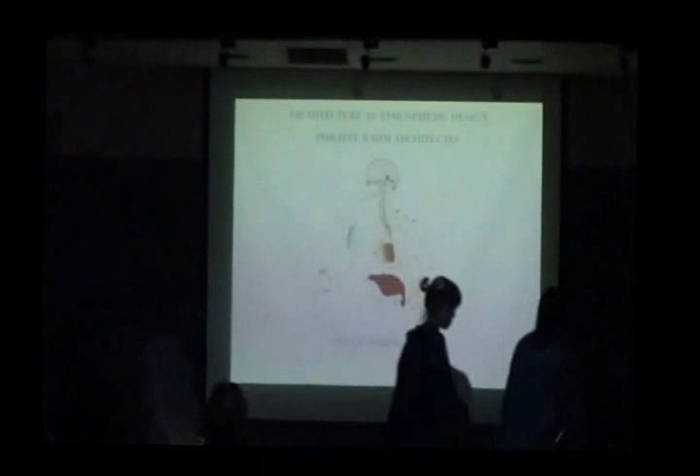Okay, so thank you, Professor Shi, for the invitation, and thank you for the school. It was very interesting yesterday to see all the projects, and I think there is some common interest.

I think about where architecture is going now, and I would like to do a presentation of my work by moving through a book we made a few months ago with 3 chapters, and I will just show one project in each chapter to explain a little my design strategy, and at the end I will present maybe the most recent development of the Taichung Jade Eco Park, currently under construction in Taichung.

Maybe first, the title of the book was Constructed Atmosphere. I don't know the right translation in Chinese, but there is this idea that architecture is about space, and space is about atmosphere, because what is a space? A space is an empty room. It's something empty where people could go inside, and I think the void itself, the space itself, is a real material. It's not empty. It's something. It's composed by light, by air, by humidity, and all these components have different qualities. So it could be warm or cold, light or dark, humid or dry. So there are some components that are defining the space itself.

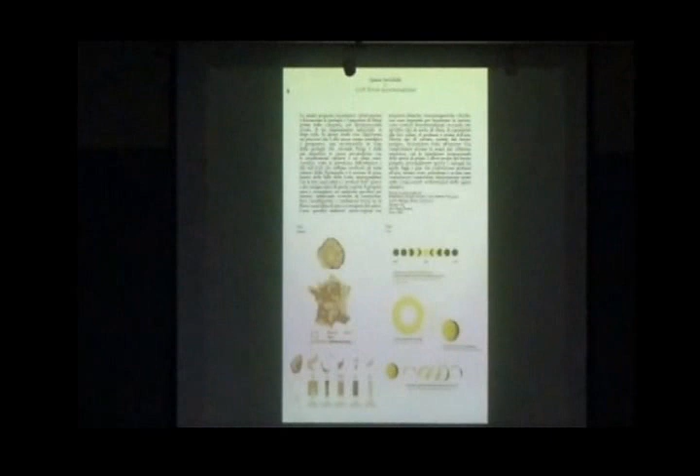I will not explain everything, but there is also a type of food and some different things linked to humidity, linked also to a kind of French smell or things like this. And this is another project based on light. We start to analyze the wavelengths of the light, and to understand the relation if you have a blue light or a red light or a yellow light, what is the influence on the body. For 20 years there has been a very big knowledge about the relation between the physiological body, the eye and the light, and I will show this after for one project.

So this is a study about these elements, like the air, the humidity, the light, to start to analyze them quite precisely in order to work with them in a very precise way that could develop a new imagination for everybody, for the architect, and also some new way of designing.

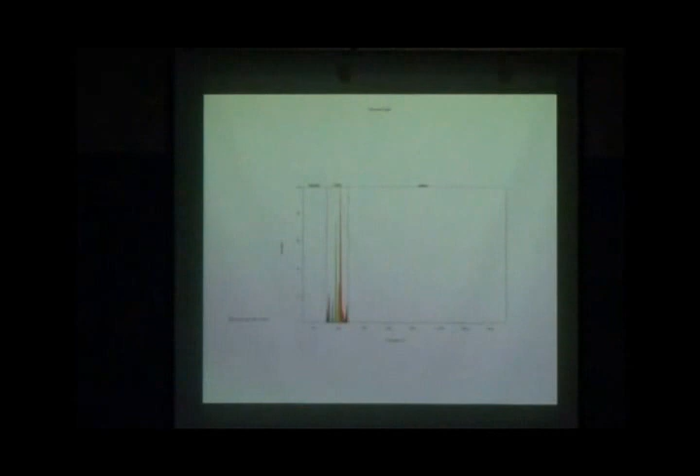And why the LED is better for energy saving is because of the composition of the LED. LED light is based on semiconductor material, and, like I could show this here. Yeah. Today we know like 15 different semiconductors. This is all the semiconductors, and each semiconductor, depending on what type it is, it could be gallium arsenide, phosphide, or gallium, different types of semiconductor. Each of them produces one peak, in a single wavelength.

So it means you will never use one LED that produces infrared. It will be always in the visible range. So you could be very efficient in the choice of the LED. And to create different colors, because the first LEDs were the red and the green, and then recently, like 10 years ago, there was a Nobel Prize for discovering how to do the blue LED light, and then today, since some years, we could have a white light by adding all these three semiconductors together, by adding RGB, you know, like on the screen.

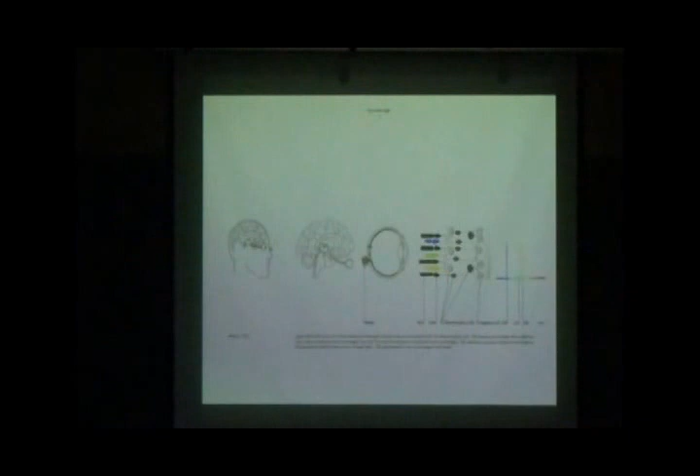Okay, and then there are some other wavelengths, for example for melatonin, and we say for humans we need these 4 wavelengths. So this is what we need. We will pay only $4 for doing the light, and not $40. We just use the minimum according to the intensity of the natural sunlight, because we receive more blue than red from sunlight, according to the natural white light that is perceived. So we reproduce the intensity of each wavelength. So this is the light for the human.

And then we say that in one house, we are not alone. Maybe there is also a dog, a plant, a bird, or a mouse. And we say, okay, what is the good light for the different animals?

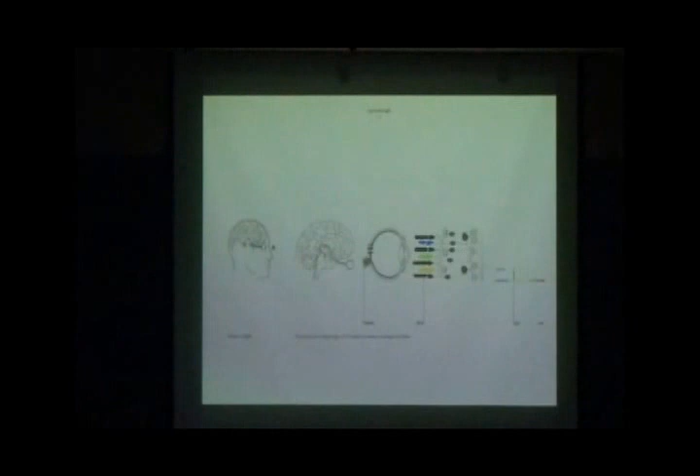So we start to analyze for a mouse. In reality, a mouse sees only one color. He sees a very strange world, because it's a green world. The world of the mouse is green. He sees only at 505 nanometers. This is the only color that the mouse sees. You see more or less green, but this is the only color. So we add one peak of wavelength for the mouse.

And then, the dog. The dog sees only 2 colors, in the blue and green wavelength. So it's why we often say the dog sees in black and white, but in reality he doesn't see in black and white, he sees in blue and green. So these are the 2 peaks perceived by the dog, and we add this also in our lamp.

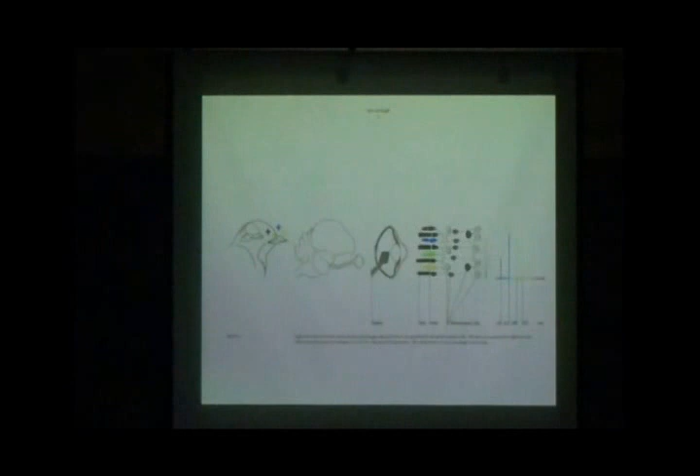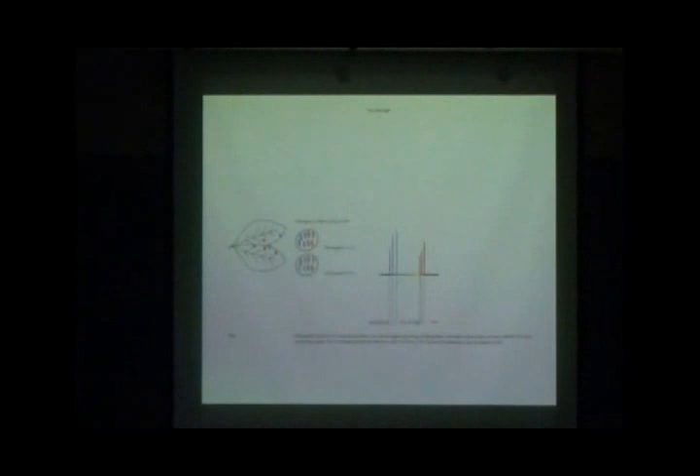And then the bird sees more than us, because he sees also some ultraviolet, and different wavelengths. So we add also the bird wavelengths. And then there is the plant, and for photosynthesis, the plant's leaf is green because it reflects the green light, but all the red light and blue light is absorbed for doing photosynthesis, to transform the carbon of the air into carbon inside the plant. And this is the wavelength of the peak absorbed by the chlorophyll.

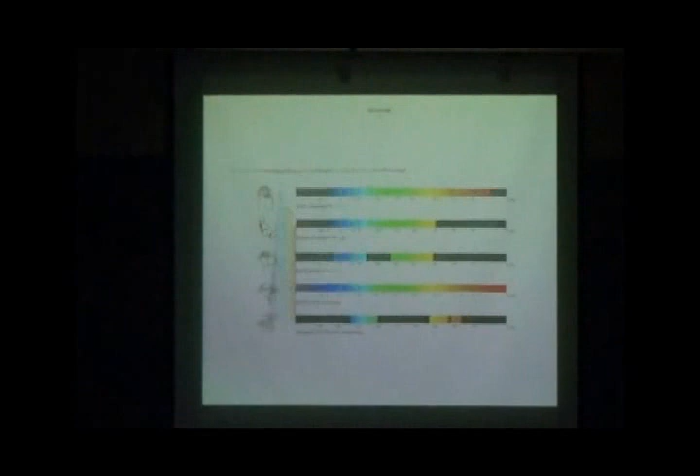There is a chlorophyll A and chlorophyll B, and so we also add this color inside the product. And then this is the intensity, the natural light intensity for each color. And then we choose different intensities.

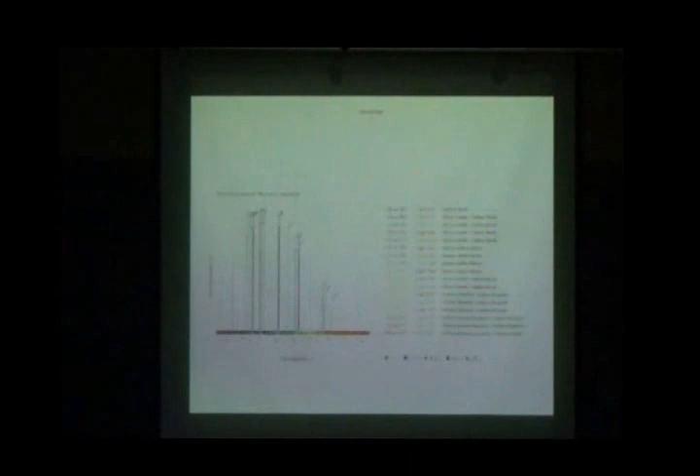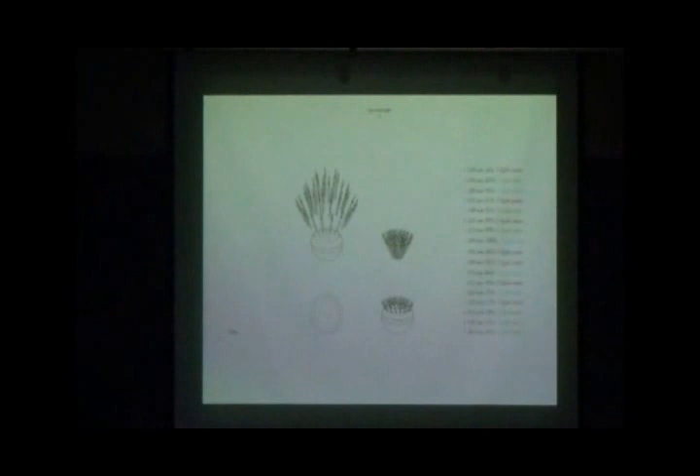And then everything goes together, and finally we say all these wavelengths together create white, because they're mixing together. And so this is the design of the lamp. Each rod is one wavelength, and they converge, focusing on one plate that mixes all the light, and then it recomposes a kind of economical and biological white light.

And then we say, okay, maybe you could turn on, if you are alone in the house, the human light, and if you have a dog, you turn on also the dog light, and if you go out with your dog, you keep only the plant light on.

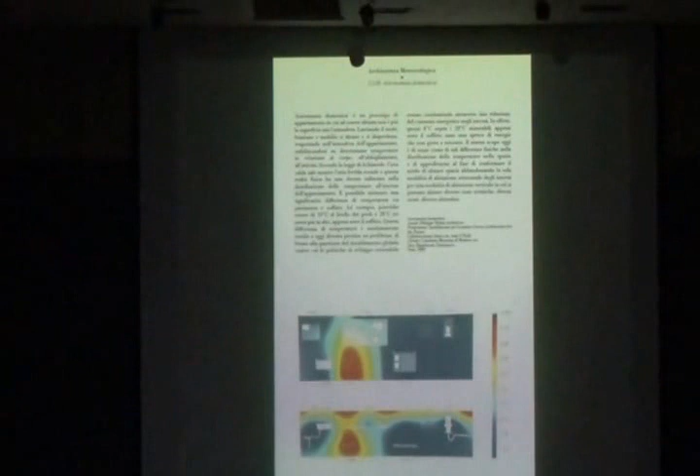This project is based on convection, because the warm air goes up. So in cold countries, for example, you lose a lot of heat under the ceiling because nobody is there. So we propose some different strategies in order to save energy and become more efficient from a heating point of view.

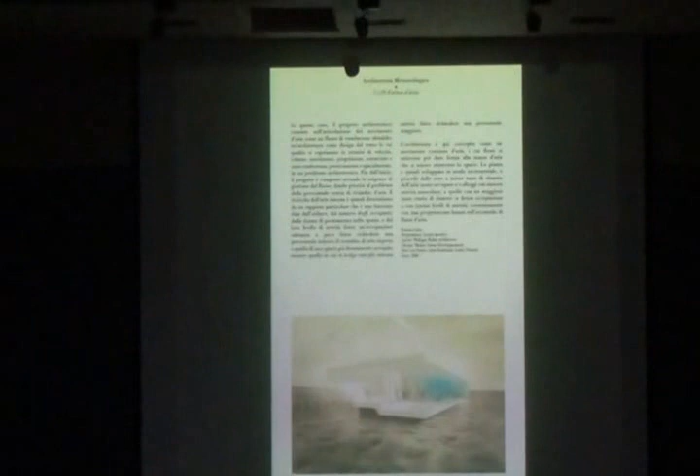This one, for example, is about humidity and ventilation, because you blow air in the dry space first, then the air moves to the most humid area, and then it goes out. So this is how to understand the design of the space based on this.

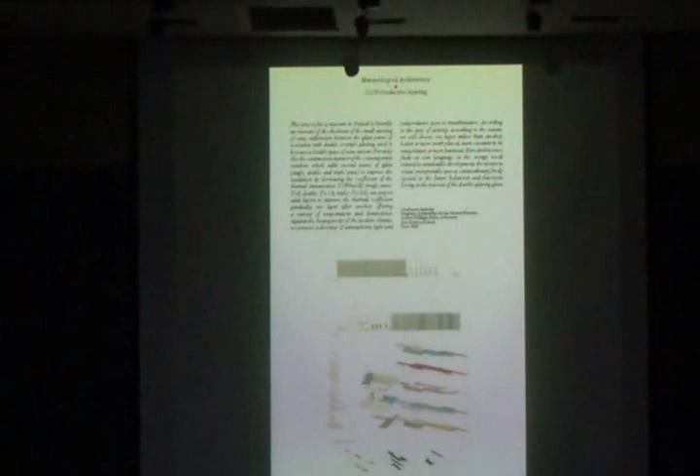Then this one is based on conductivity, the wall and the glass—if you have one layer or two layers of glass, you have more thermal insulation between inside and outside.

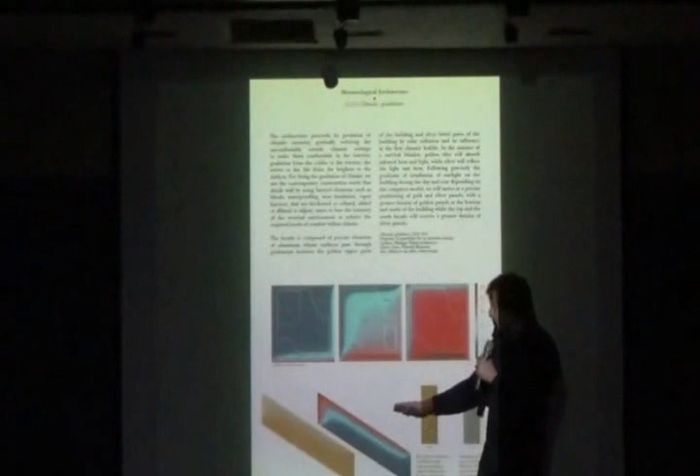This one is about how to design the albedo, depending on the color of the material. We talked about this in the car, but for example, this is a facade, and because warm air goes up, it's very warm at the top level and colder below.

This is a project in Switzerland. So we propose to change the material of the facade in order to accumulate more heat at the bottom and less at the top, to compensate for what naturally happens. We propose to reverse this phenomenon by changing the material—if it's white, it will reflect light and heat; if it's black, it will transform light into heat. So you could decide the color, and depending on the material, it will absorb or reflect infrared. So the choice of facade could be very important from a sustainable point of view.

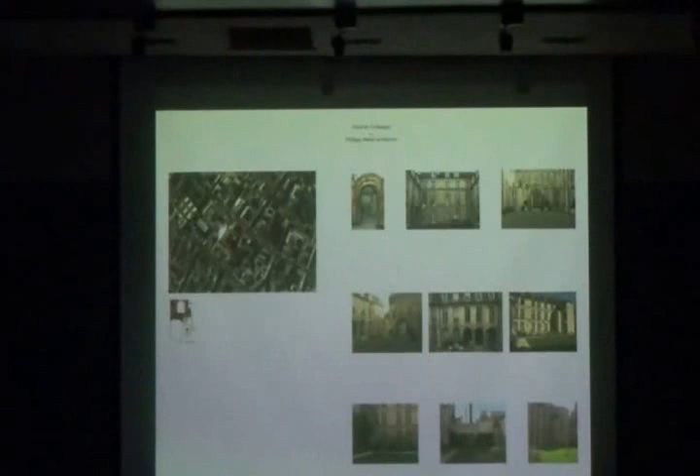So normally you could do nothing outside, and the idea—I was thinking maybe it's not good to do a modernity inside the old, a kind of contrast, but to find a new way of designing things. And we just start to...

Analyze how to change, because in this building the wall's U value, the coefficient of heat transmission, is too high, so it means it's cold. The cold could go through very quickly, and so you lose a lot of heat during the winter to heat the space inside.

And today in France you have a new regulation: you have to have a U value of the wall of 0.15 watts per square meter per Kelvin. So it's in order to block the heat, to use a very small quantity of heat in order to warm the space.

And for doing that, we calculate the quantity of thermal insulation you have to add. It's like 20 centimeters. So you must add 20 centimeters in order to reach the target of the new regulation, it's called RT 2012.

This is the target of the energy saving that all buildings in France must reach today in order to be sustainable. So if you start to analyze, this is a little the history of the building: before it was very cold, because the cold goes through in the floor, and so the floor was really cold.

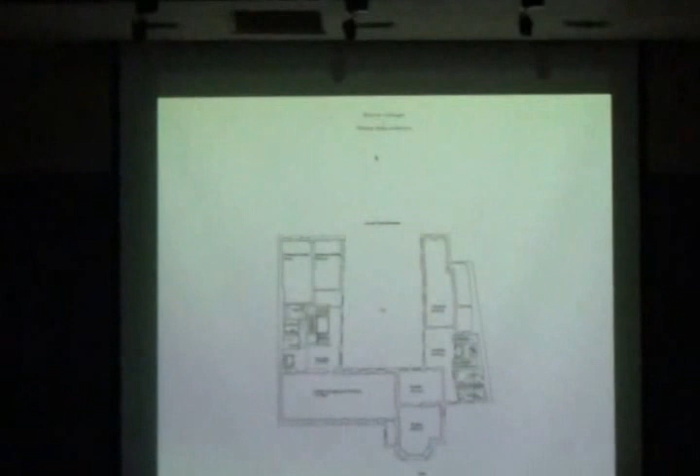And in reality what happens, it creates—I don't know the English name—a moulure. Because if it comes back, it will create, like in the old Parisian style, this type of decoration. So by coming back with this 20 centimeters, we are creating new and useful moulure, and the decoration finds a new, real reason why we need to do some decoration on the ceiling.

And so we do the same for the convection—this is a little the story of convection. Before it was cold, and then there's a fireplace, a chimney, and the furnace, and then the radiator, and today this is the diagram of the different ways of heating.

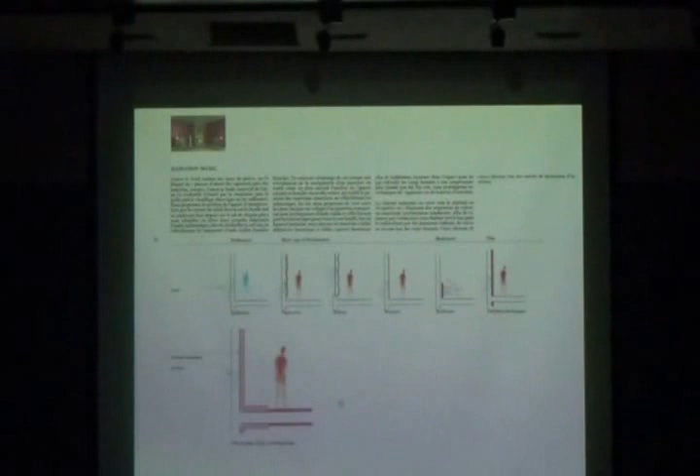So if you use floor heating, this is the curve—this is the most economical and the most efficient curve today to warm a space, because if you have a normal radiator, it becomes too warm near the ceiling. So we change that.

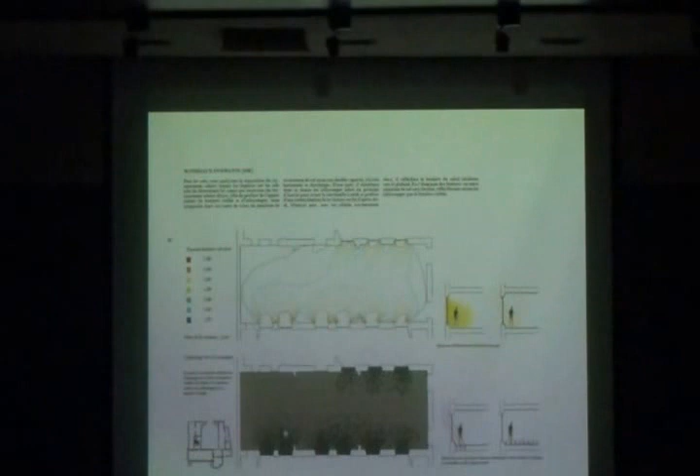And then we continue also with the radiation from the wall, and then the ventilation, the light. And during the winter we could also get some more heat coming from the sunlight. So we could start to analyze the impact of the sunlight on the floor, and say this part will reflect the visible white light, but will transform the infrared, the invisible light, into heat that goes into the ground in order to get some inertia value with infrared natural light.

So we start to make a new pattern according to this, which means you could reinvent the marquetry, the way to design the floor, very precisely, but according to new values, some ecological values.

So you finished the floor part, or? Just say a last thing. So here, for example, this is like the new—

We call this the new style—we call this the Anthropocene style. It's a kind of the style of today, and so here we also use this type of things.

It's copper, a steel plate, in order to take the heat that is accumulated under the ceiling and to bring it back down by conduction, to have like a radiator down below, and here we have panels that block the radiation. So we rethink all the different things according to new ecological and sustainable values.

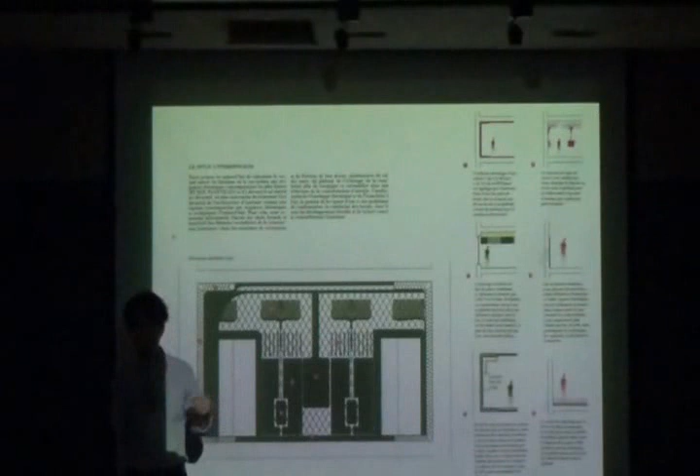Finally, we have two new spaces. One space is this one. It's a little like the project we saw yesterday. This is a new room underground with geothermal wells that go underground. We must have like 2.5 kilometers of structure that go underground. So it's divided in 10 wells of 250 meters down, and it produces 50 kilowatts of heating.

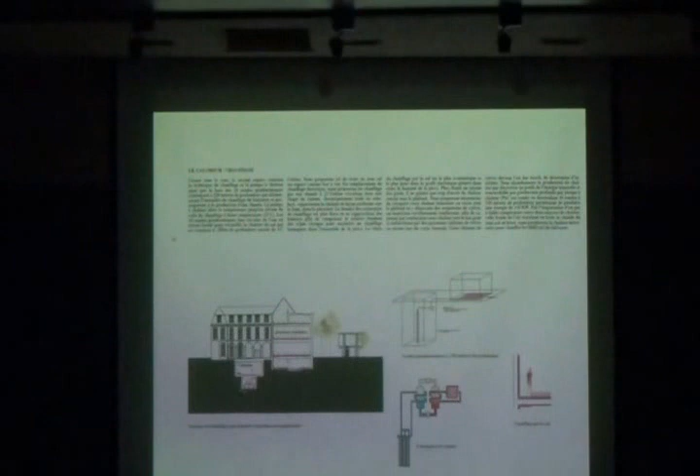So it's warm with these new things here. It will produce all the heating with green energy for all the buildings. So it's no more oil, no more nuclear power. It's green energy that will bring heat to the floor heating. All the floor heating comes from that. So it's a new place. We call this the calorium. It's the room to produce heat. So this is a little the design of this room.

And then we have another one in the garden that will produce the new air, with heat exchange ventilation. So we take the air in the garden, and it's like a greenhouse. We warm the air in the winter, like inside a greenhouse, and then we have a heat exchanger here, and the new air goes there and comes back, and there is a heat exchange here in order to recuperate the heat before it goes out.

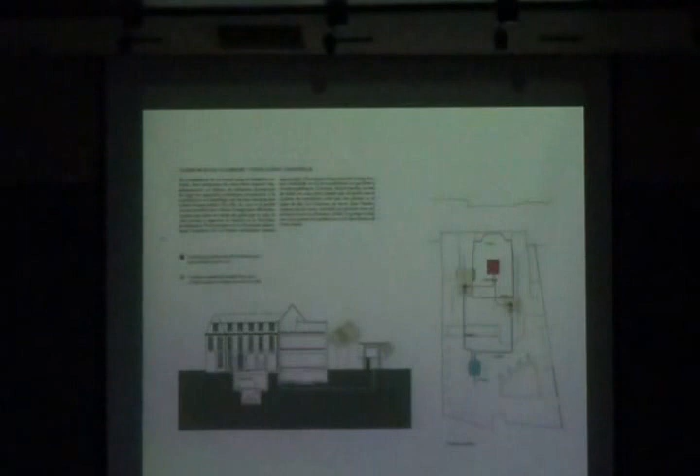Okay, so the last part of the book was about the thermodynamic city, and in this part we present different urban projects, and I will finish with this. This is a project in Copenhagen, and of course the Jade Eco Park in Taichung.

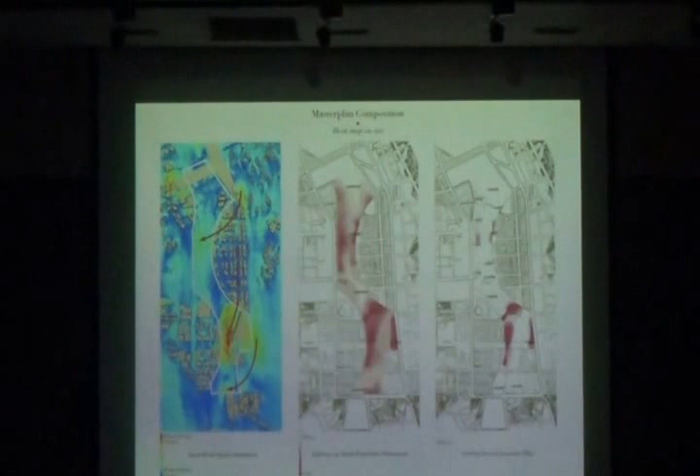And in the red and the yellow and orange area, it will be a little colder or more comfortable. And in the blue one here, it will be warm, very warm. And so we say, okay, we will reinforce where it's a little colder by adding a lot of trees, cooling trees and cooling devices, to create a colder area. And where it's warm, we will let it warm because it could be useful in the end of the afternoon or during the winter. You prefer to go in a warm area than a cold area.

And for doing that, we place a lot of cooling trees. We choose some specific trees that have big leaves or a lot of leaves in order to cool. And we have more than 10,000 trees in the park.

And after, we also create some park equipment, like furniture of the park. We call these climatic devices. This is a little like what you could find in every park in the world. It's like a fountain, a kiosk or pavilion, or a small architectural structure that will give some other experience of cooling effect.

And then, this is a map of the trees. It's very dense. It's also like an impressionist way of composing by gradation. And here these are the cooling devices, and then all the activity follows the climate. So the leisure activities, the black dots, find position inside the park like this.

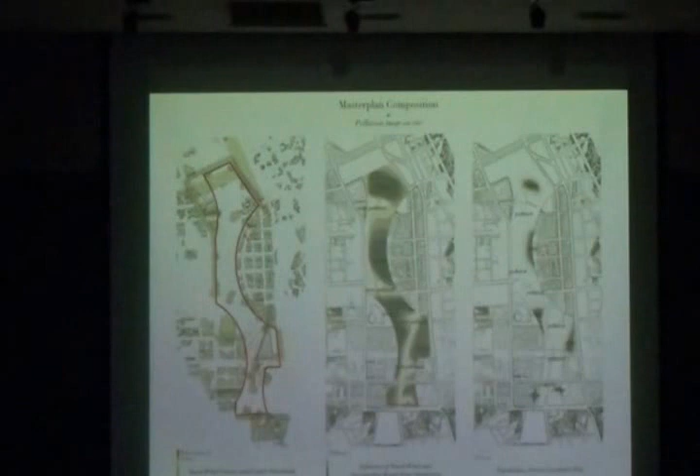And so we did the same for the humidity and for the pollution. There are some big roads here and here and here. So far from the road, far from the noise and the pollution of the cars, we place all the children activity and a lot of trees that catch the pollution of the air, and also what we call the depolluting devices. So these are the trees, these are the devices, and this is a children playground and activity there, far from the road, in the most protected and least noisy area.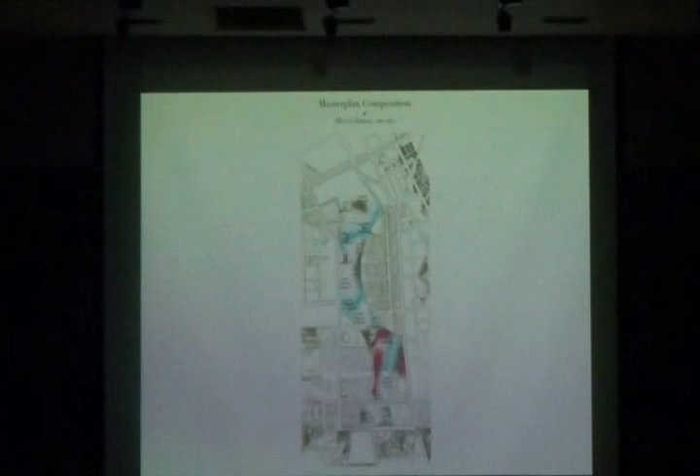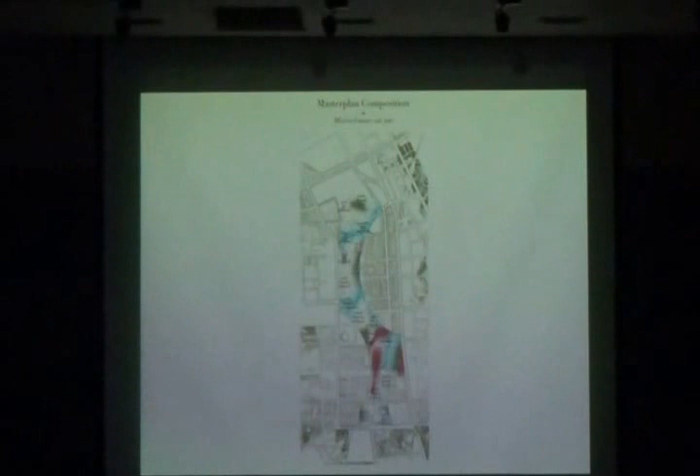And then all these layers overlap, so it generates different types of microclimate. If you prefer to go there, you could go there. If you prefer to go in the most dense forest, you could choose where you want to go. And then we also create some paths that connect the cooling places, the drying places and the depolluting places together with different types of paths.

The black path is for children, it's very flat, very easy to use, also for wheelchairs, and the red one is for a normal promenade, and the blue one is for sport players, so it's a very hard path to use. So it creates a diversity of moving through the park according to what you want.

And these are some photos of the construction like 8 months ago. This is a road that goes through the park, and we create some bridges and tunnels in order to have a continuity of the park everywhere from the north to the south. And we work with a landscape designer, Catherine Mosbach, on that.

And all the hills are for rain drainage, because all the rainwater of the district arrives on the park, and so the topography contains the rain when there is heavy rain, for example.

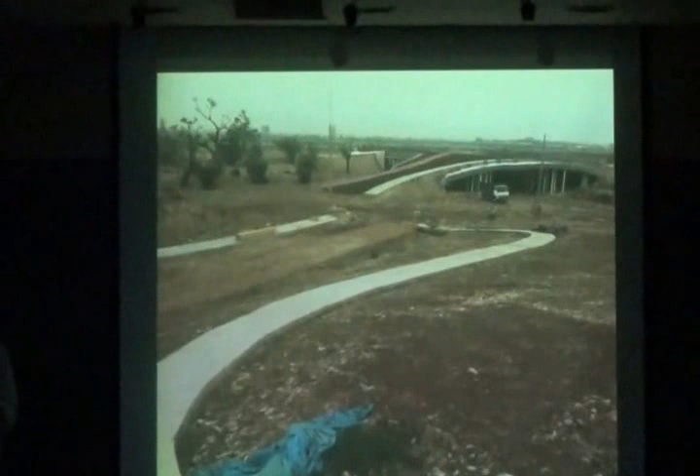Yeah, on this image we don't see the trees because they will come after, and of course here we have saved all the trees that were on site. We have 4,000 trees that were saved and they are waiting here in very good condition in order to move to the new location after.

Then I will present the cooling strategy, and after the intelligent system, and then I will finish in 10 minutes. I hope it's okay.

So this is the first layer, the heat layer. So we see the master plan. We did the master plan, and then we see that there is some area that becomes very dense because we have trees every 3 meters. So it becomes very like a forest.

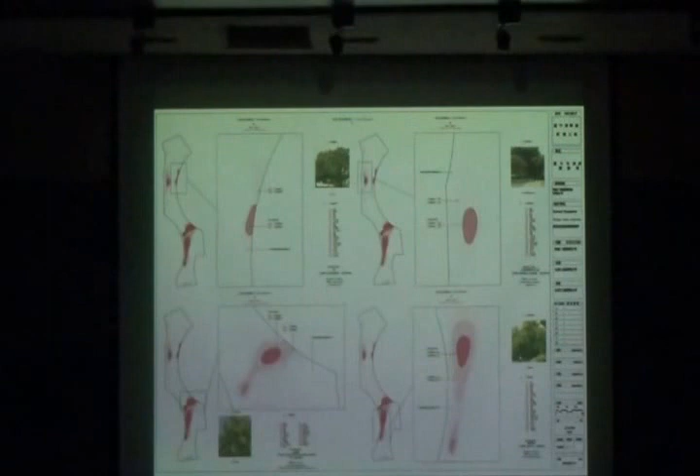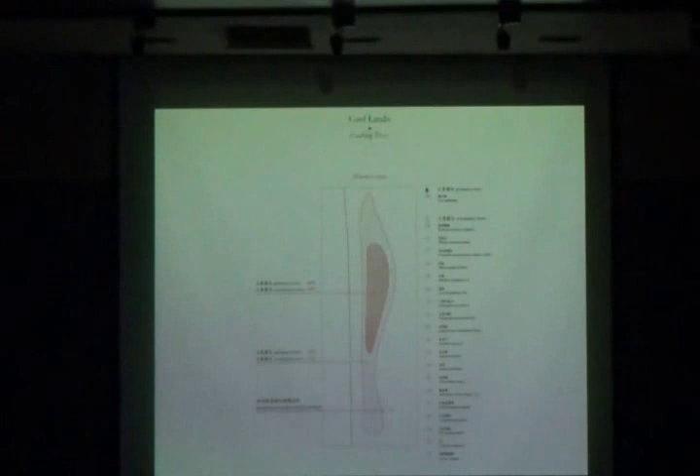And then we have some specific trees there. The choice of the trees is based also on the cooling effect of the trees. We choose some species of trees that have a strong cooling effect. And then sometimes, because we have a lot of trees, we change one of these dots. This is a tree here, so you can see in the middle it will be very dense, like a real dense forest.

And then sometimes, every 10 trees, we change to an artificial man-made structure. And this is one of these. These are the cooling devices. So in reality, it's like park furniture, park equipment, like a little fountain, pavilion, kiosk, this type of things you could find in every park in the world.

But these have some more. Some of them have some specific action. So this one, for example, blows cold air. These are like fountains, but creating mist or cloud and cooling by evaporation. These are like cold radiation with a kind of network of cold water running inside. These are shadow, different types of shadow.

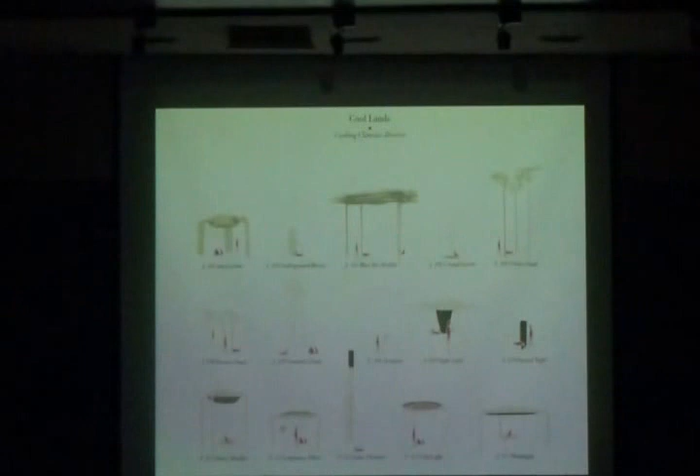So why do we want to cool the area? Because we calculated, we looked at Taichung, and we know that when the temperature of the air becomes higher than 29.4 degrees Celsius until 32 degrees Celsius, it becomes too warm. So you start to feel uncomfortable.

So we checked how many days in Taichung are over 29.4 degrees. We see that there are more than 200 days. So the idea to cool will be efficient or interesting during 200 days. And how to cool, and why it's too warm? There are 3 reasons why it's too warm: because the air temperature is too high, or the solar radiation is too strong, or the airspeed is not enough.

When you have wind, it's more comfortable, but when you have no wind and a lot of sun and the air temperature is high, it becomes uncomfortable. This is what I show here. So how to reduce this? We could reduce it by lowering the air temperature, by lowering the intensity of solar radiation, or by increasing airspeed. This is how we could cool the space, cool the body.

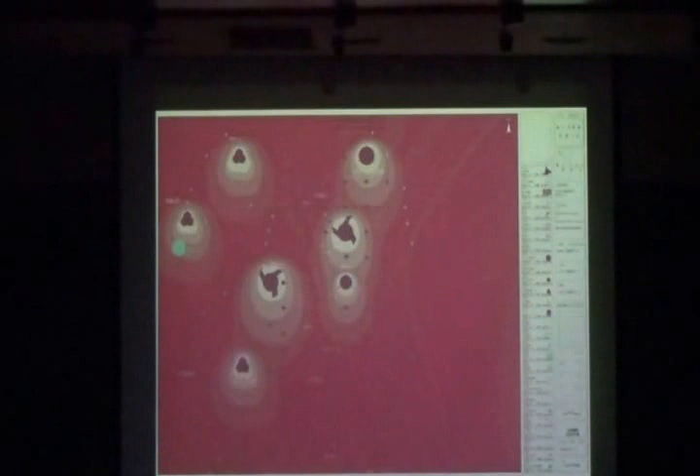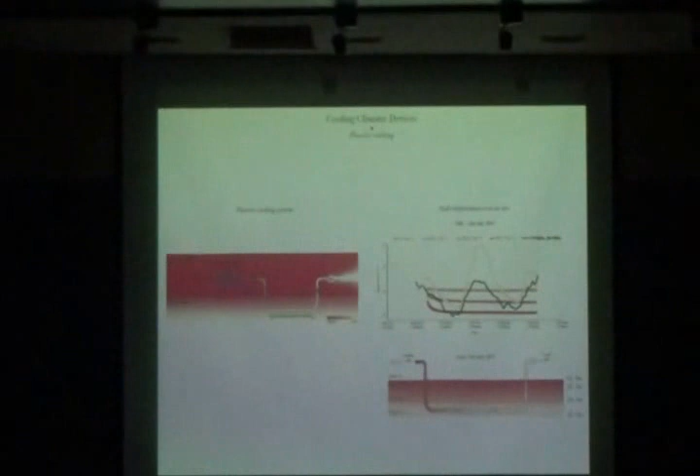and here this is a map of these devices inside the trees, and this is a little of the effect of some devices. And I will show one device. This is the anticyclone. So how to cool the air. We use only green energy. So we use geothermal cooling.

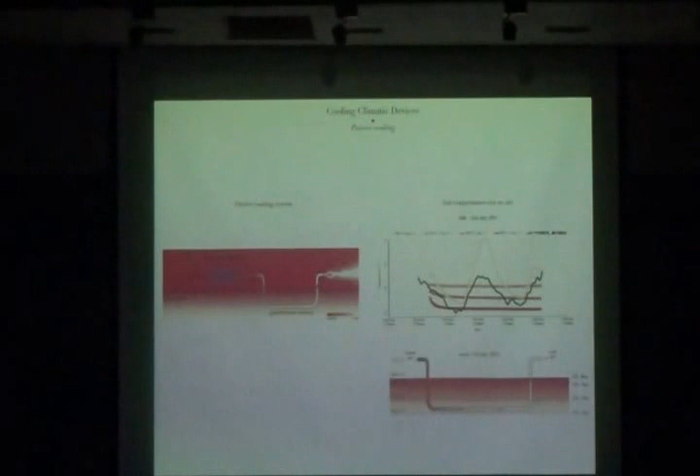Not here, but we did some measurements on site to see the temperature in the ground, and we saw that on the 12th of July, the temperature of the air was 40 degrees Celsius at noon, and it was 25 degrees Celsius at 5 meters down. So the idea is to go down with ducts and cool. Then you can cool the air by moving it through the underground.

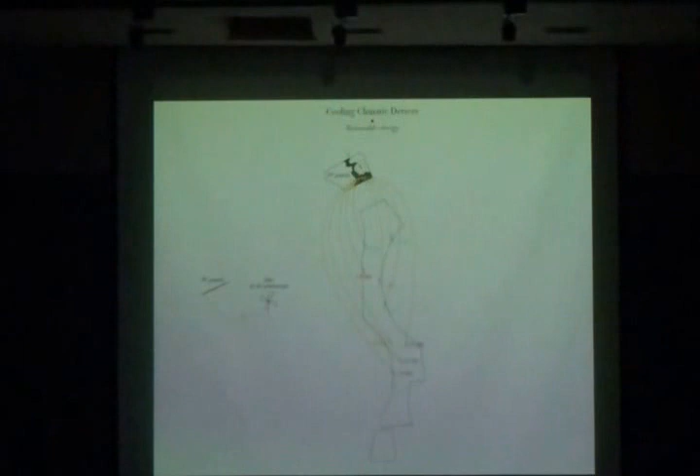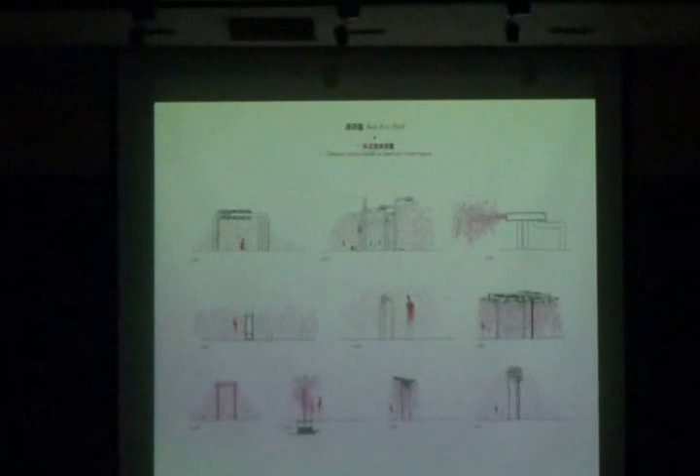And for moving the air, we use green energy only, photovoltaic panels here on the north part of the park that will produce electricity for the lighting during the night, for the building and for the devices. So there is no use of electricity from outside the park. Everything is self-sustainable. And the fan for moving the air has very low electricity consumption. And so this is to increase the airspeed.

And this is the first, how to calculate, how we did. So now I focus on this one, but this is a small part because we have only 6 devices like this in the park. So it means we have 10,000 trees, but so it's not. Okay, so it's a detail, but we did the same work for each device, for each part of the project, but I just want to show this one.

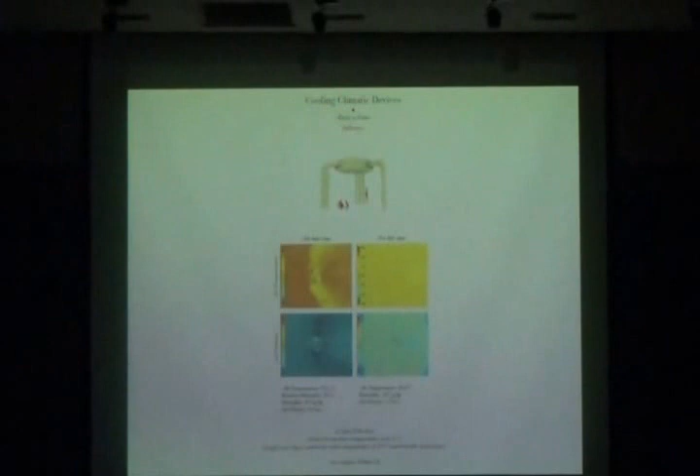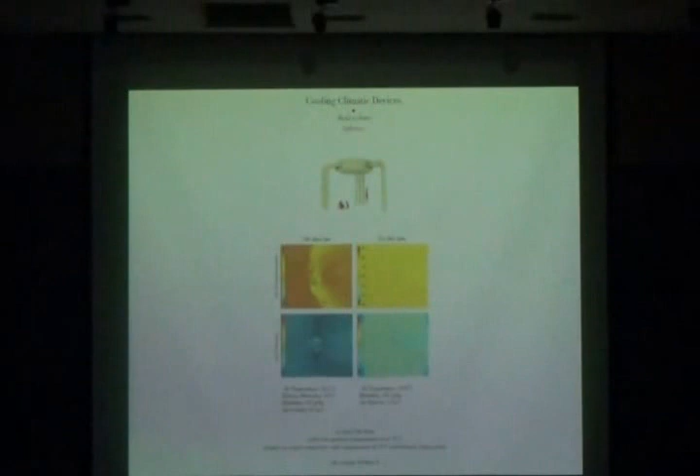And so to calculate the quantity of air, we do this with the engineer, first in Germany and then after in Taiwan, to calculate the quantity of air and the speed of air. And so we do some CFD model to know that. And so we find that we need a certain amount of air to have a certain effect that you could feel under. And the technique is like this.

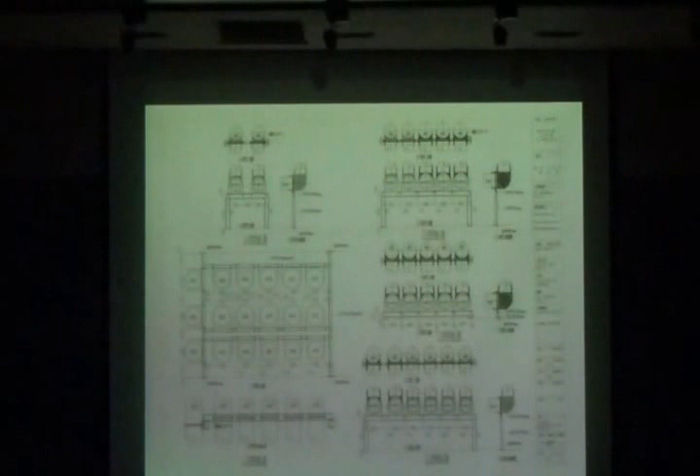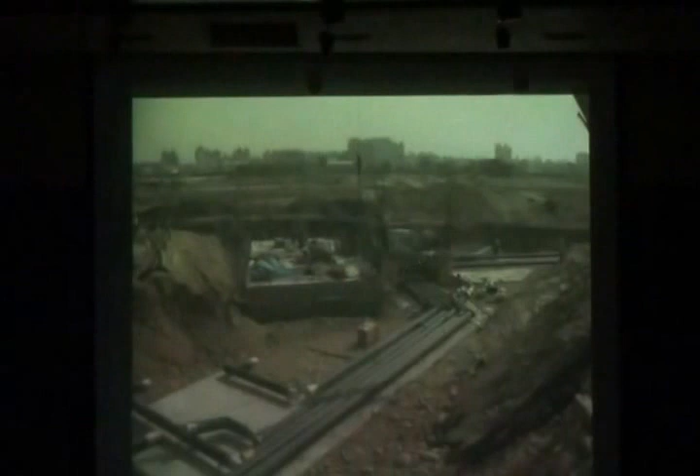We have 2 ways of cooling. We have a first way of cooling with city water, heat exchange, and then it goes down 5 meters, and then we have some duct that go underground. This is a technique that is used very often in France or in Switzerland. In Switzerland, more in France now, and in Taiwan now. So this is the underground duct. This is there, and it goes down, and then it connects to this device.

And this is a climatic plant room, where we have the fan, in order to have the maintenance and the guarantee that everything is in a good condition. And then it goes. So the air goes down. We go down 5 meters, we have the pipe and the duct.

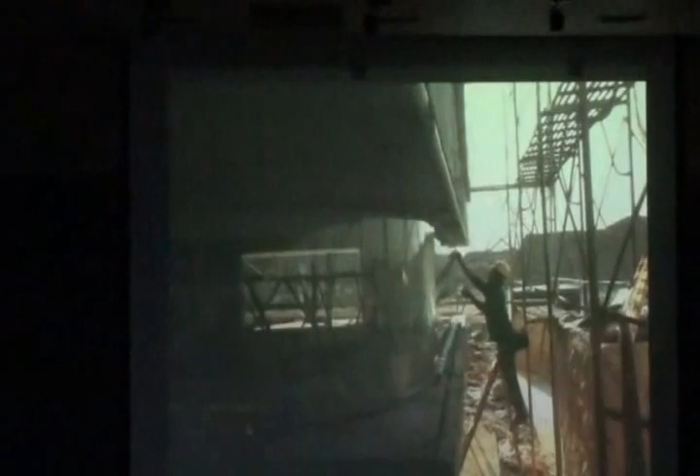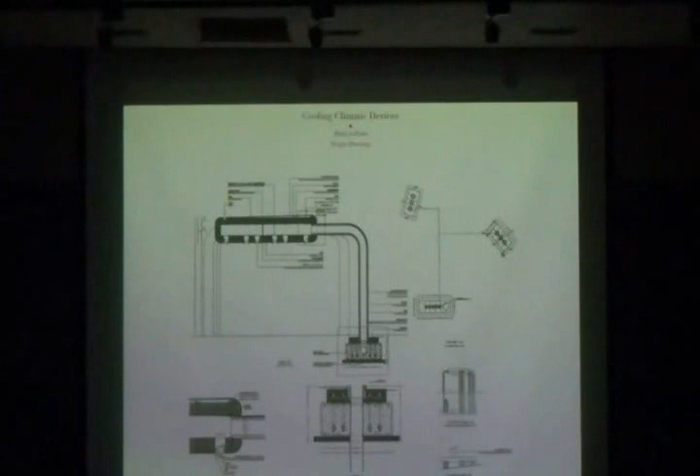And this is the anticyclone, the device itself. So the air arrives. Each leg is like a pipe, and it arrives, and there is thermal insulation, and then it's blown. The speed of air is 6.5 meters per second inside the duct in order to have no turbulences, no noise. And then it's increased to 8.5 meters per second. This is our calculation, and this is what we get at the end. So we were successful in all the calculations we made.

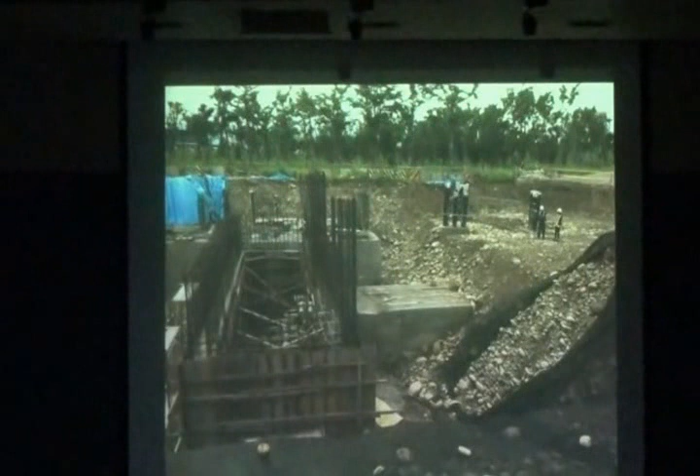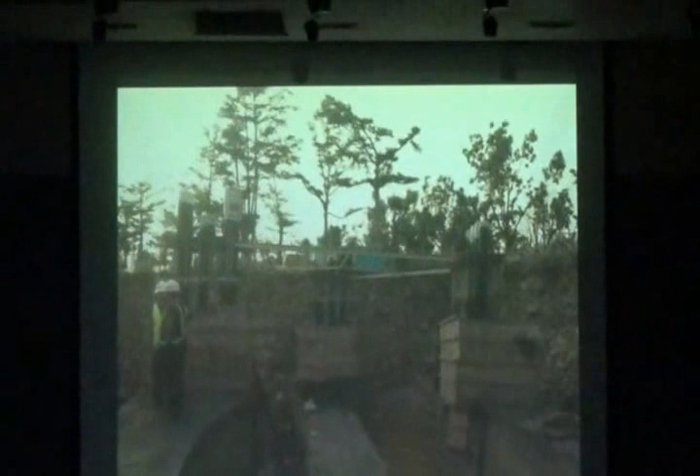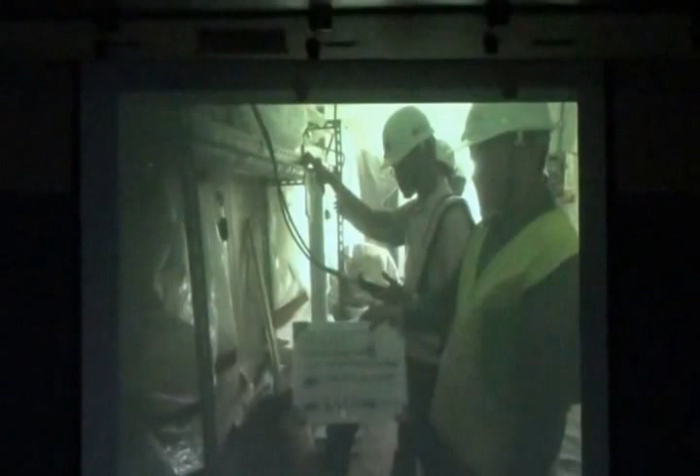So this is the 3D printing of some of the device. And it was the first device under construction, and then this is the structure, the pipe that comes out of the ground. Here we see the pipe that arrived. And then there is a leg of the device. And this is the first one. So it's like a pavilion blowing air. Cold air.

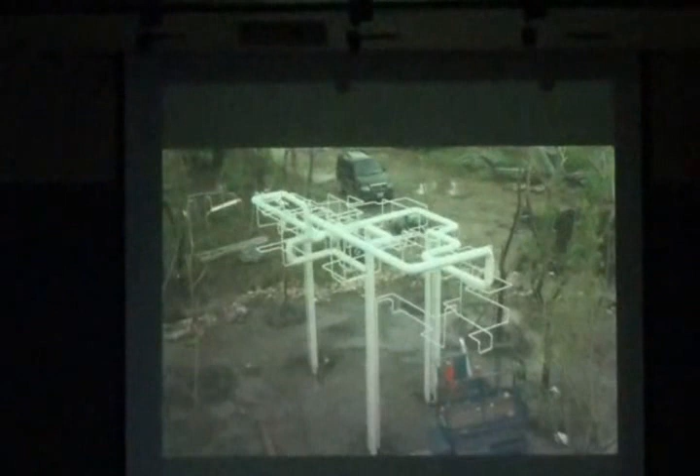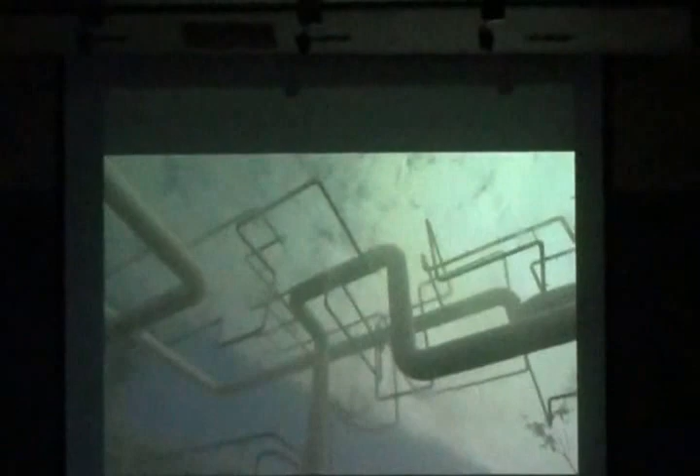And just to finish, very quickly, this is another one that blows. That is like a cloud. It's like a fountain, like a mist, something that everybody knows. And so inside the park, it becomes like an event. It's become like a landmark, and so if you want to go there, you could, or if you want to go under trees, you could do it. This is a different type of shadow also.

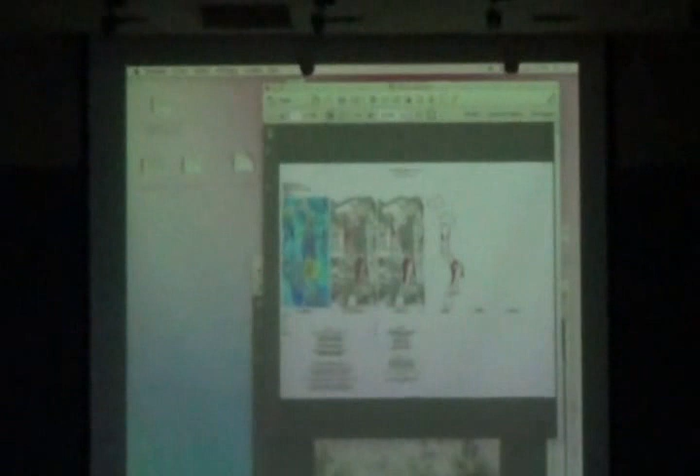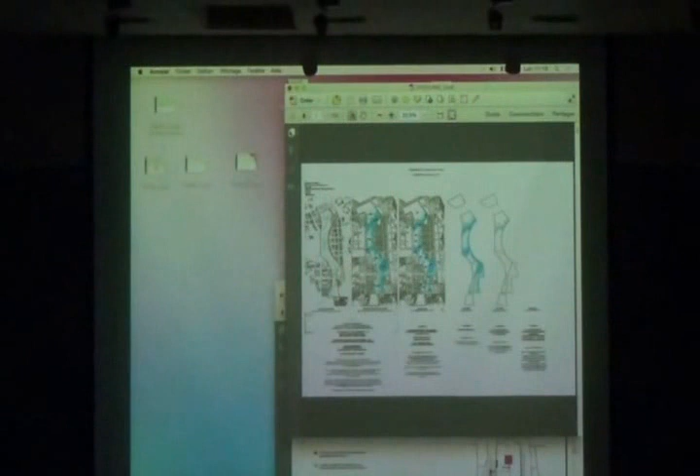But now I will finish just by showing the intelligence system. So inside the park, there is a sensor every 50 meters that measures the temperature, the humidity, and the pollution. And then, according to this, we create some maps, some index. So you could see in real time on your smartphone where it's cold, what is the temperature inside the park, and so you could decide to move there according to the temperature, and the same for the humidity and the pollution.

And so everything goes to the computer, and then, according to the quantity of electricity we produce in real time, we will use it. We will sell it first at high power, for buying back during the night for the lighting, and then for the building. And then if there is a lot of sun, it means there is more electricity, and we use the rest of electricity for activating the fan of the device.